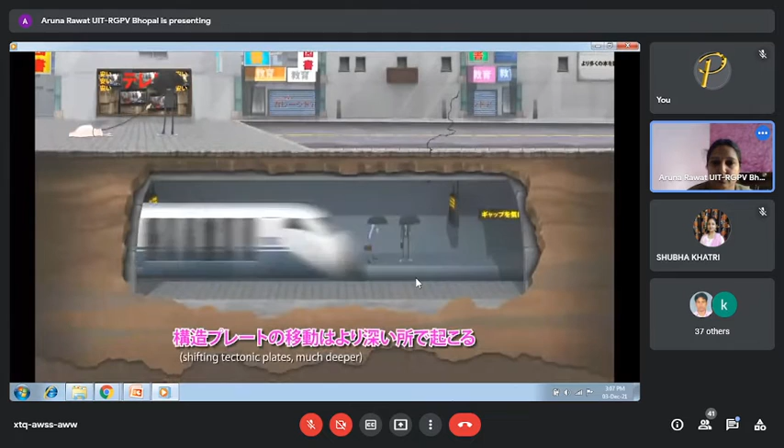If you've watched a lot of disaster films, you might have the idea that building collapse is caused directly by the ground beneath them shaking violently or even splitting apart. But that's not really how it works. For one thing, most buildings are not located right on a fault line, and the shifting tectonic plates go much deeper than building foundations. So what's actually going on?

In fact, the reality of earthquakes and their effect on buildings is a bit more complicated. To make sense of it, architects and engineers use models, like a two-dimensional array of lines representing columns and beams, or a single-line lollipop with circles representing the building's mass. Even when simplified to this degree, these models can be quite useful, as predicting a building's response to an earthquake is primarily a matter of physics.

Most collapses that occur during earthquakes aren't actually caused by the earthquake itself. Instead, when the ground moves beneath a building, it displaces the foundation and lower levels, sending shock waves through the rest of the structure and causing it to vibrate back and forth. The strength of this oscillation depends on two main factors: the building's mass, which is concentrated at the bottom, and its stiffness, which is the force required to cause a certain amount of displacement.

So my basic concern will be related to the building's strength and the stiffness of the building. Now, as you have seen all these sessions, this is your 14th session. So when you say a structure has to resist an external input,

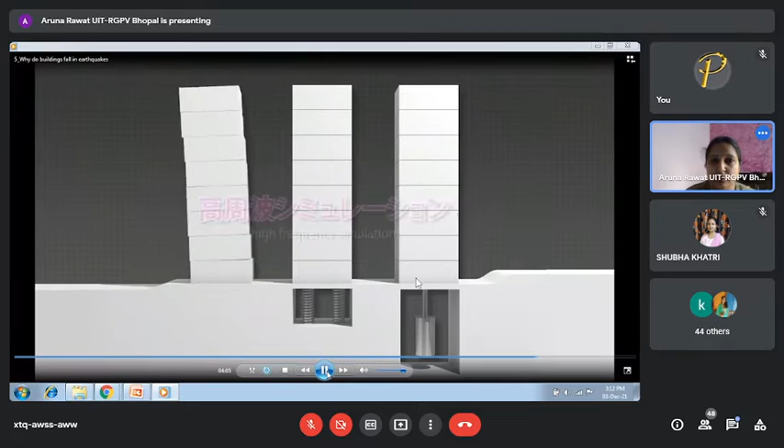Today, engineers work with geologists and seismologists to predict the frequency of earthquake motions at building sites in order to prevent resonance-induced collapses, taking into account factors such as soil type and fault type, as well as data from previous quakes. Low frequencies of motion will cause more damage to taller and more flexible buildings, while high frequencies of motion pose more threat to structures that are shorter and stiffer.

Engineers have also devised ways to absorb shocks and limit deformation using innovative systems. Base isolation uses flexible layers to isolate the foundation's displacement from the rest of the building, while tuned mass damper systems cancel out resonance by oscillating out of phase with the natural frequency to reduce vibrations. In the end, it's not the sturdiest buildings that will remain standing, but the smartest ones.

This video explains why buildings fail in earthquakes. I've shown you that video about the lack of strength and ductility due to poor detailing of reinforcement, basically speaking about RCC buildings, and how design deficiency is introduced.

Design deficiency is caused due to failure to understand the failure mechanism and deficient systems of calculation. If your structural analysis is incorrect, then the bending moment and shear force on beams or columns are calculated incorrectly. Based on that, the design will also be incorrect, causing a design deficiency. Precautions must be taken by the structural engineer while doing calculations or design.

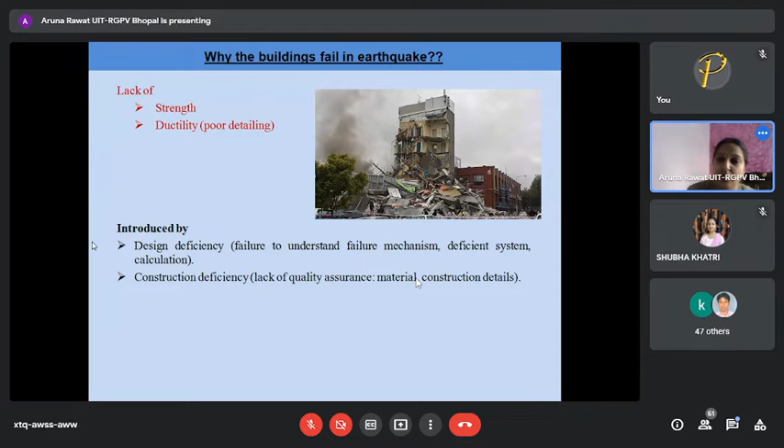What are the challenges in seismic design? Earthquake resistant design of any structure is very challenging because our input is random. We don't know how the input is there - there is uncertainty.

We don't know how much magnitude of earthquake will come, or for how much period it will last. Based on past records, earthquake zones are created in the IS codes or other codes of the world, but we don't know how it's going to happen in future.

The structural response depends on the input motion - how the earthquake motion is going to be - and also depends on the structural properties, like stiffness. Stiffness is basically a property where the height of the building, the cross sectional dimensions, and the material of the building have to be considered.

There is uncertainty in the input also - where the next earthquake will occur, on what fault it will occur, of what magnitude it will be, the nature of ground shaking near the source (the epicenter), and the effect of travel path on shaking at a distance.

Most importantly, as we saw in the video, making an earthquake resistant structure is not only the responsibility of a structural engineer, but it has to go hand in hand with the architect as well as the geological engineer.

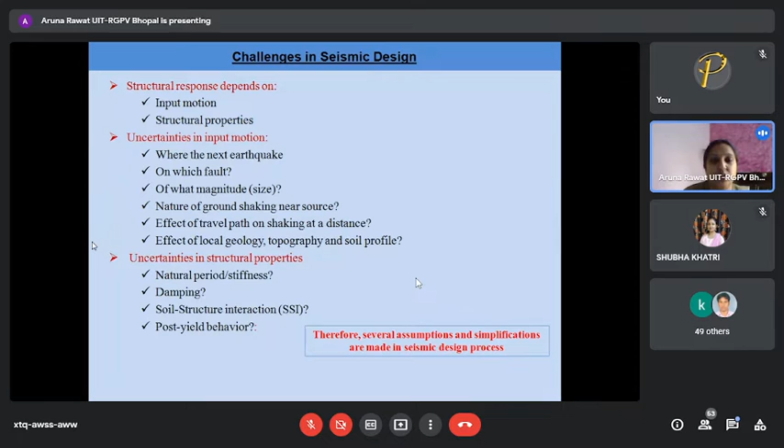How your structure behaves - all these things have to be studied. If the uncertainty of structural properties is studied correctly, then your structure will not collapse - it will bend, but it will not collapse. Therefore, several assumptions and simplifications are made in the seismic design process.

The objective of earthquake resistant design: we know that severe earthquakes are rather infrequent. So in the lifetime of a structure, it may happen that it will not face any severe earthquake - the probability is very low of strong shaking during its lifetime.

The next question is: should the structure be designed to withstand strong shaking without sustaining any damage? If the probability is very low, and you design a structure for such strong shaking, what is going to happen?

Constructing a structure to resist strong ground shaking can be too expensive. So the next option is that it may be logical to accept some damage in the case of strong but infrequent shaking. Our aim in earthquake resistant design is that loss of life and the content in the structure must be protected even in the case of strong shaking.

The final aim we have seen in all these sessions of the FDP is that our aim in earthquake resistant design is that the building shouldn't collapse, that is, there must not be loss of life and property, that the structure should stand, or there might be some structural damages which can be done in a repairable manner.

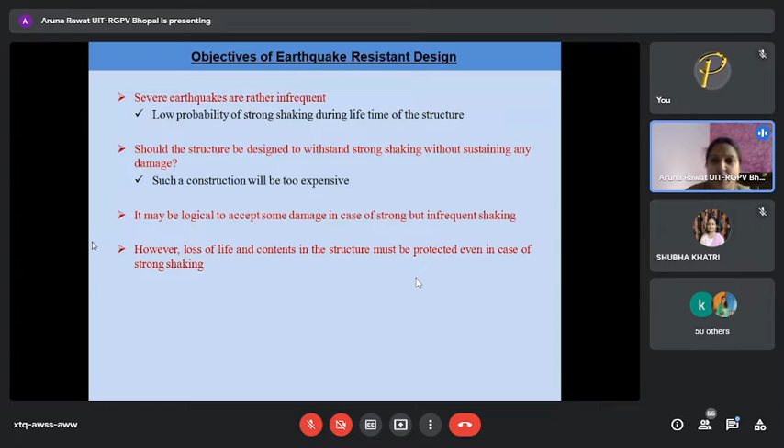So you have to go for some lightweight materials, which are now in advanced stages and are mostly used in the earthquake resistant design of structures.

So what is earthquake engineering? It is the application of civil engineering to reduce the life and economic losses due to earthquakes. That is the aim. When you say earthquake engineering, it is a part of civil engineering, and the aim is to mitigate the seismic risk.

So what is seismic risk from the engineer's perspective? It is the probability of losses occurring due to earthquakes within the lifetime of a structure. These losses can include human lives, social and economic disruptions, as well as material damages. So you have to reduce the seismic risk.

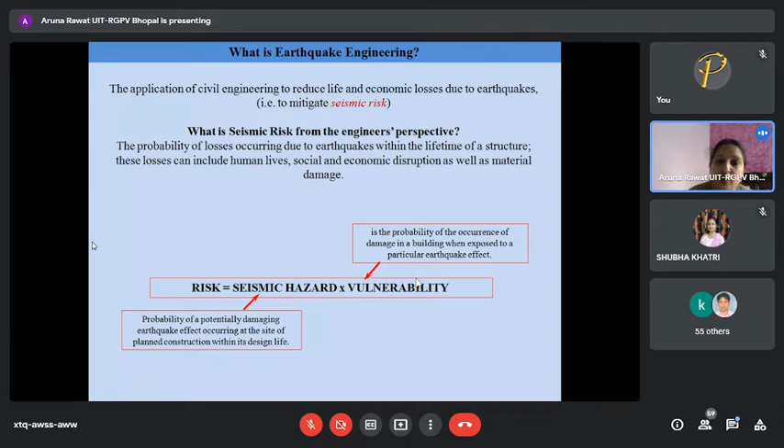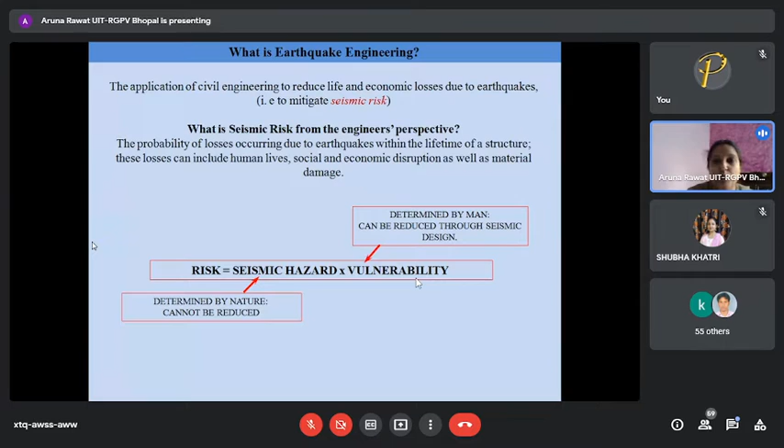So the seismic hazard is caused by nature, which cannot be reduced. But the vulnerability can be reduced, and that is what the earthquake engineer or structural engineer is doing - that can be reduced through proper seismic design of the structure.

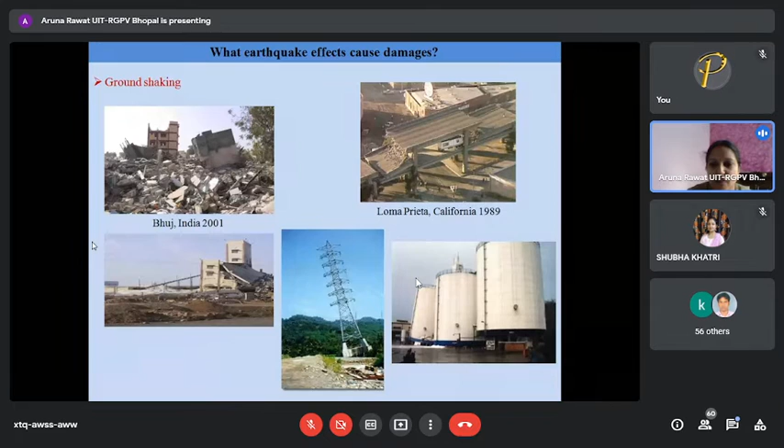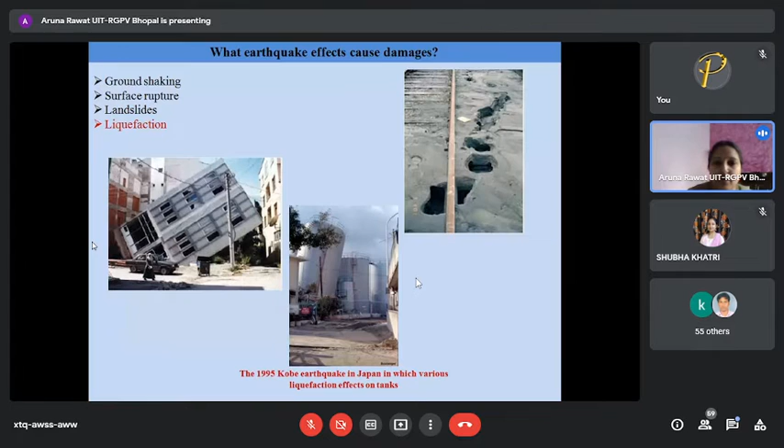So I will just show you the slides. This was already discussed by a number of experts in our FDP program. They have shown the effects of earthquakes which cause damage, like ground shaking, surface rupture, landslides, liquefaction effect, tsunami, and finally it may cause fire also. So I am skipping this quickly.

How can we achieve collapse prevention in the global sense? The one thing I discussed in the very first slide is the deficiency in design, which can be prevented by providing proper redundancy in the structure and also by proper detailing in the form of ductile detailing.

This part was also discussed by various experts, showing that a structure should be able to resist minor shaking with no damages. Moderate shaking may show some non-structural damages, like machinery damage, but no structural damage. In severe shaking, there are structural damages, but the final aim is that the structure should not collapse.

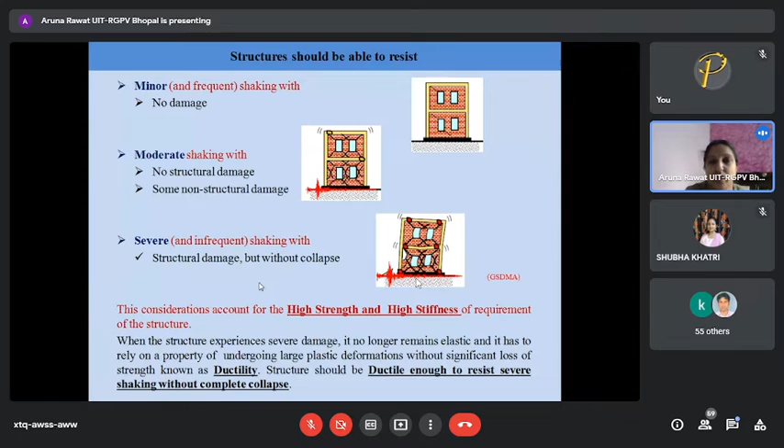So the structure should be ductile enough to resist severe shaking without collapse. The ultimate aim of an earthquake resistant structure is achieved through proper designing and ductile detailing.

Let me discuss some basics briefly. Ground acceleration occurs at the base of the structure, and due to that, structural vibration occurs due to inertia forces, which is mass of the structure into acceleration, generating force at the floor mass level.

Since earthquake force is in the lateral, horizontal direction, the horizontal members—the slabs, or what you can call the diaphragm—first transfer the force to the floor mass level. So suppose your building is 100 stories, the lateral force generated at the ground level will be transferred to all 100 floors of the building.

From that floor level, the aim of the building is to transfer this load coming on the floor level safely back to the ground. While transferring from the diaphragm to the ground, if this mechanism is disturbed, there is failure in the beam or column, and the structure fails.

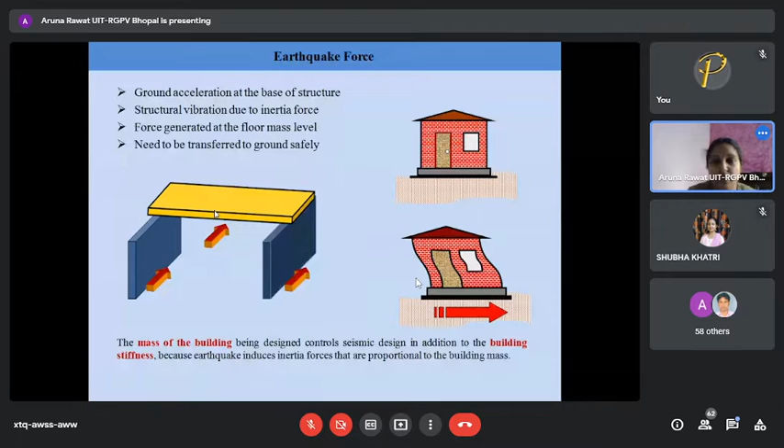The earthquake induces inertia forces that are proportional to the mass. Whenever you write the equation of motion, it is basically m times a. So m times a, the mass, that is the inertia force. Then you write the damping term: m x double dot, that is mass and acceleration, plus velocity x dot proportional to the damping of the structure, plus stiffness k multiplied by x, will be equal to the input force in the form of an earthquake. So the inertia force, the damping force, and the stiffness force of the structure, on the left hand side, will resist the input force on the right hand side.

It was also discussed that earthquake motion comes in a random direction, but for simplicity we resolve it into three components. The seismometers, or the seismological graphs generated at the recording stations, are given in the form of accelerations in the longitudinal direction, the vertical direction, and the transverse direction. So there are two horizontal components and one vertical component.

Generally from the design point of view, the vertical component may be in the upward or downward direction, and people generally neglect the vertical component of the earthquake. But in the past it has been seen that the vertical component can't be neglected. There are some evidences where, compared to the two horizontal components, the vertical component was more severe and cannot be neglected.

As in the case of the IS code also, IS 1893-2016 says that if you don't have the vertical component, you can take it as 2/3 of the horizontal or lateral component of the earthquake. But in the case of critical structures like water tanks, pipelines, dams, or nuclear power plants, the vertical component can't be neglected.

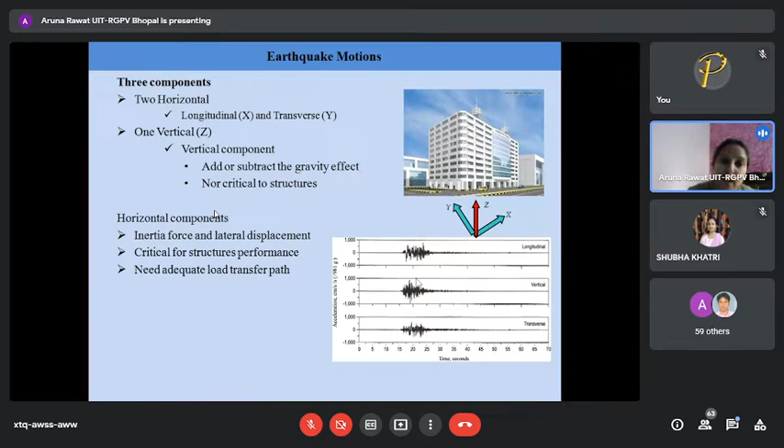In the case of horizontal components, you can see they cause inertia force and lateral displacement, and you need an adequate load transfer path. This is the most important part we will discuss here: the load path for seismic forces. The lateral or horizontal earthquake force first transfers to the horizontal members, that is, to the horizontal diaphragm or the slabs. So this load path for seismic forces is important.

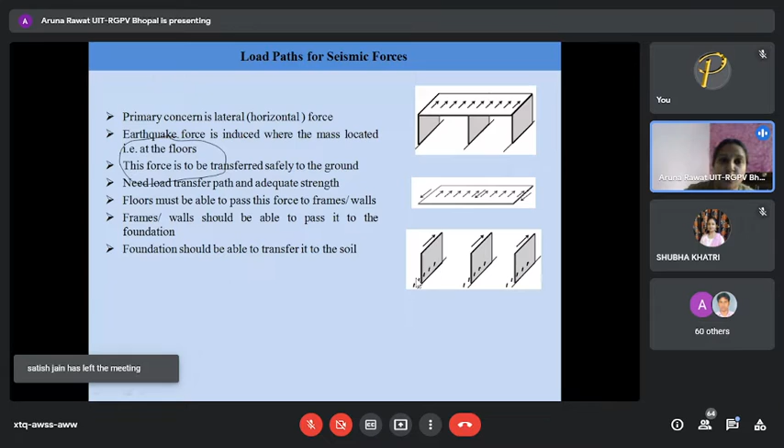The primary concern with lateral or horizontal force is that the earthquake force is induced where the mass is located, and the mass of the structure is located at the floor levels. So this force has to be transferred safely to the ground, and for that you need a load path. This load path has to be created, and it should have adequate strength.

The load has to be passed from floors to the walls or beams. If it is a load bearing structure, the diaphragm load from the floors will pass to the walls and then to the foundation. But if it is a framed structure, it will be transferred to beams, from beams to columns, columns to foundation, and finally to the soil below.

If this path is weak somewhere, it forms what is commonly known as the chain analogy, and this weak point is the link. If any one link in this chain is weak, it may create damage or collapse of the structure. So you have to detect the weakest link in the chain behavior.

If the building subjected to ground motion is idealized as a chain being pulled, then the links of the chain represent the building elements. One link represents the slab, one link represents the beam, then columns, then foundations, and so on. So this load path can be represented in the form of a chain of links. As different elements have different characteristics, the links of the chain will also have different strength and deformability.

Each chain will have a different link because your slab will have a different strength, the stiffness will be different, and the deformation will be different. Accordingly, each chain will have different properties in that case.

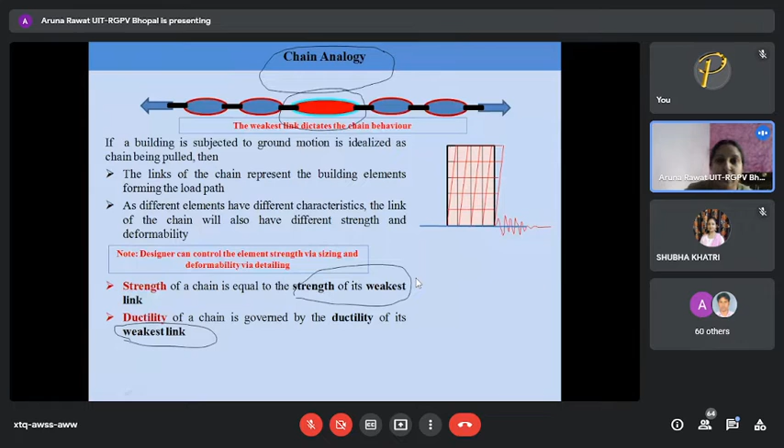So a designer can control the element strength by sizing, and deformability by proper detailing. The strength of the chain is equal to the strength of its weakest link, and the ductility of a chain is governed by the ductility of its weakest link. So your aim is to check that weakest link.

If a ductile link is there and we draw a force-deformation diagram for a ductile material, it will go elastic, then plastic, and there will be a large deformation. But if a brittle link is there, it will suddenly fail. Like glass or concrete materials are there - they are brittle materials, so sudden failure or collapse will occur.

So you have to see this weakest one. For example, if 110 is larger than 105, but if it is having a brittle link, then it will fail at 105. But if it is a ductile one, even beyond 105, it will carry 120 and so on.

So increasing the element strength does not increase the performance. Strength hierarchy rather than absolute strength is important in this case. So whenever the weak link is ductile and the strong link is brittle, then you are ensuring ductile behavior.

But if you make your strong link ductile and the weak link brittle, then the failure will occur due to that weak link, and since the weak link is brittle, the combined failure will be brittle. So the brittle link should be designed to exceed the capacity of the ductile link - your ductile link should always be less than the brittle link. Suppose your ductile link is 100, then your brittle link should be greater than 100.

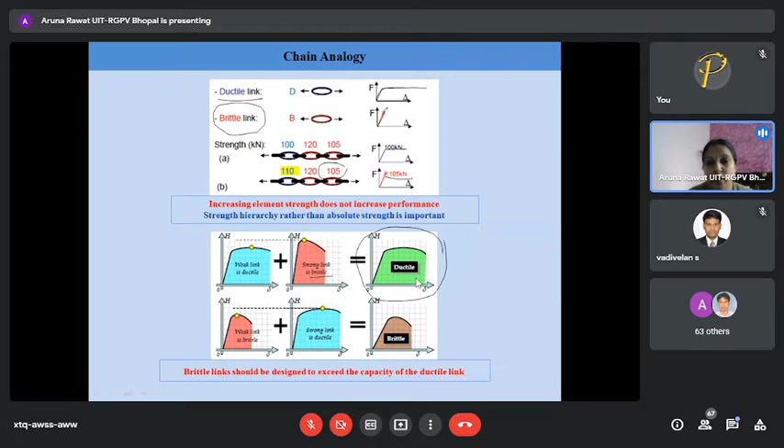So you want your structure to behave as a ductile link. So who should fail first in a frame? In an RCC building, it is made up of various components like slab, beam, column, foundation, and finally it goes to the soil. This is the hierarchy we see.

This is the load path we see. If a slab fails or a diaphragm fails for a particular floor in a building, it will affect that particular floor or room. The building is not going to collapse - that particular room or floor will have damage.

If a beam fails, it affects that story. If a column fails, it affects the whole building, and this is what we don't want - we don't want our columns to fail. So we go for the strong column, weak beam concept.

If your foundation fails, this is the most serious part, as discussed by our previous experts who showed the soil-structure interaction. If foundation fails, it is very difficult and more serious. And if your soil fails - like black cotton soil or liquefaction damages in the soil - it is even more serious. In this case, you have to work hand in hand with the architect, the structural engineer, and the geological engineer. So the convenience is in providing the ductility.

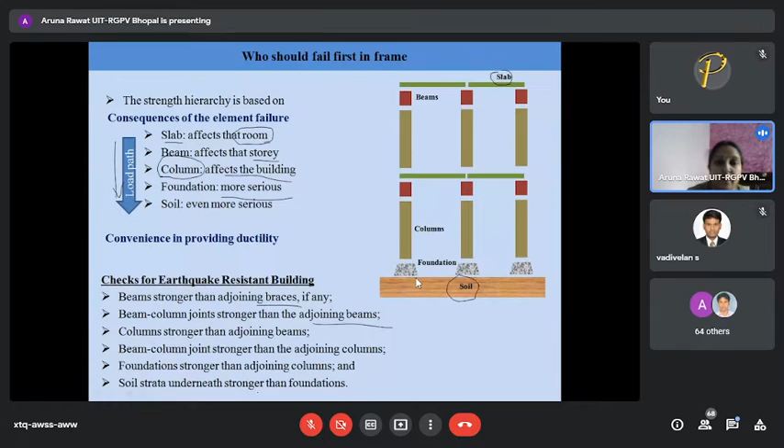If the load path is designed properly, then definitely your structure or building will be earthquake resistant. So what are the four aspects which architects and the design engineers have to work on to create an earthquake resistant design?

This has already been discussed by a number of experts, so I'm not going into too much detail on these figures. The seismic structural configuration involves the size, shape, and structural system carrying the loads, such that they ensure a direct and smooth flow of inertia forces to the ground.

Your building should be symmetrical, not unsymmetrical. Your plan should be symmetrical, like square or circular. You shouldn't go for X cross sections, Y cross sections, or C cross section shapes of the building. Also, the length of the building shouldn't be very large compared to the width, or the height very large compared to the cross sectional dimensions.

So this is how size, shape, and structural systems affect the seismic structural configuration. The next important aspect is lateral stiffness. Its lateral load resistance system is such that earthquake induced deformation does not damage its contents under low to moderate shaking. Stiffness is in terms of the cross sectional dimensions of the structure and the height of the building.

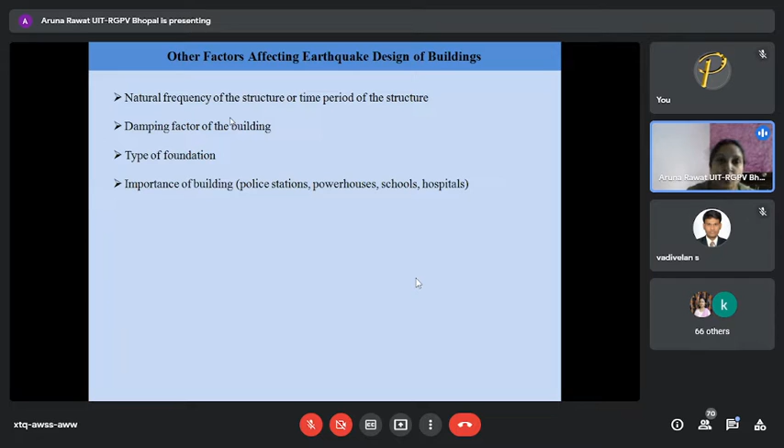For example, if you're designing a school building, the importance factor I has to be taken as 1.5, and so on. For normal buildings, we take it as 1. So all these parameters are considered in the earthquake codes.

There are some structural irregularities which increase the complexity of the structural behavior. The advice from earthquake resistant building design is that you have to keep it simple. If you create more complexity in the structural behavior, you disturb the load path of the structure, and if this load path is disturbed, you disturb that chain analogy, and finally the load will not be transferred safely to the ground, causing disturbance that leads to collapse or failure of the structure.

So whenever earthquake resistant design is done, it should be simple. It should not have a large number of structural irregularities. The IS code says you can't neglect irregularities, but they have given certain limits for them. Abrupt changes in geometry should be avoided. You have to avoid these types of complexities.

Non-uniform disposition of mass. Suppose you have a 10-story building and in all floors the mass is the same - no issue. But if at a particular floor you increase the mass, say at the sixth floor level, what has happened? It has created a non-uniform disposition of mass. If you have made that floor a storage area, or created a swimming pool there without considering the increase in mass, it may disturb the structural behavior.

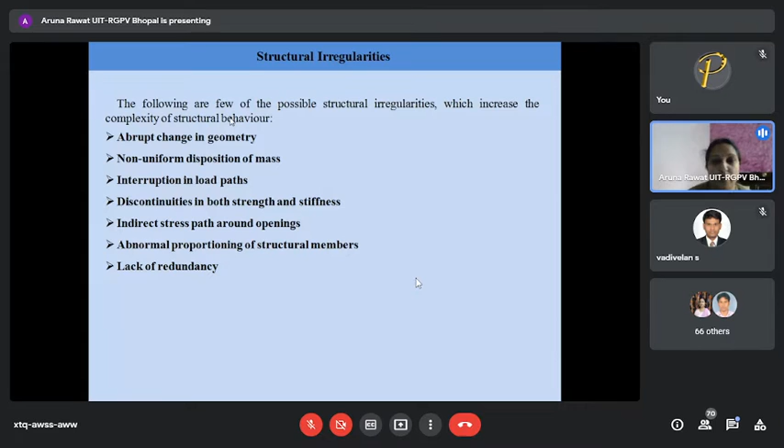Lack of redundancy is one of the two most important points which I discussed in my very first slide - the lack of redundancy and the lack of ductile detailing. If these two things are done properly, then definitely your structure will resist the earthquake.

So I will go for stiffness distribution first. We have seen in the previous slides strength and stiffness. The horizontal stiffness of the building depends upon its height and should be uniform. So you can't make a 10-story building with floor heights of 3 meters each, but at a certain height change from 3 meters to 4 or 5 meters - it shouldn't happen.

What is going to happen to the stiffness of the building? Suddenly at that particular floor where you have changed the height, the stiffness of the building gets changed, because stiffness is 12EI by L cube, or H cube you can say - it is inversely proportional to the height of the building. So you have to plan a building with uniform height in each floor. Then your horizontal stiffness of the building will also be uniform.

Change in the structural system of the building from one floor to the next will increase the potential for damage and should be avoided. So as I discussed, you can't suddenly change the height of any floor, and you can't suddenly change the mass of any floor.

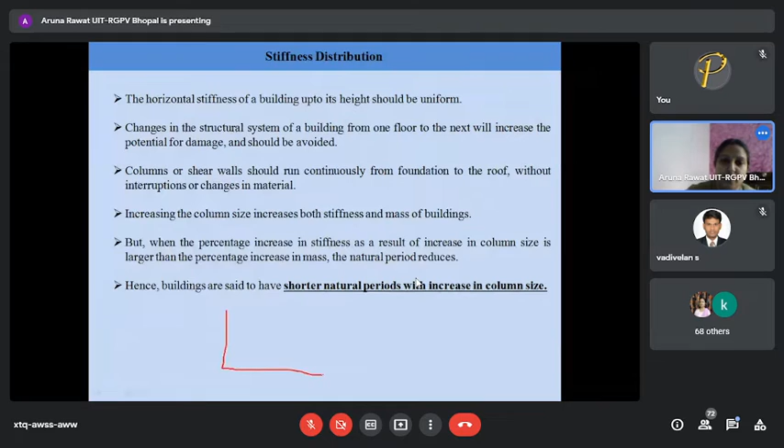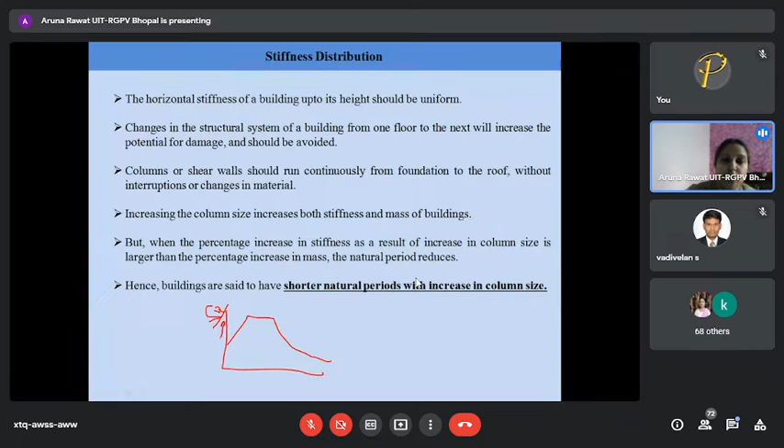Accordingly, the SA by G parameter, which you determine while calculating the horizontal acceleration—as discussed by the previous experts when calculating the base shear of a building—is related to this equation, and the SA by G graph was shown to you. This SA by G value, as discussed by many experts, along with the horizontal component, is most important, and this SA by G value is dependent on the time period of your structure.

This is the frequency of the structure. Now, if the frequency of your structure matches with the frequency of the earthquake, then definitely there is resonance, and your structure is going to collapse. So this time period of the structure is the most important part in designing for earthquakes, and this time period depends on the stiffness and mass of the structure.

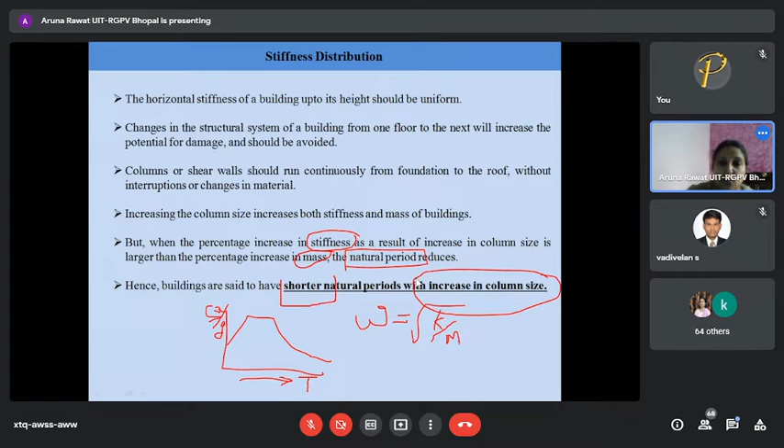So buildings are said to have a shorter natural period with increase in column size. If you are increasing the column size, what is going to happen? You are increasing the mass, and your time period, or omega, or frequency—that is your k by m—so if you are increasing the stiffness, what happens to the frequency? In this case, it will get shorter; your natural time period T gets shorter.

Next, here we have discussed related to stiffness distribution. Two important parameters which I am discussing are the stiffness and the strength.

The lateral strength of an RCC building depends on many factors, as discussed previously, like structural configuration adopted, the material strength and ductility, the relative sizes of structural members, amount of reinforcement used in the members, and the strength and stiffness of the joints between members.

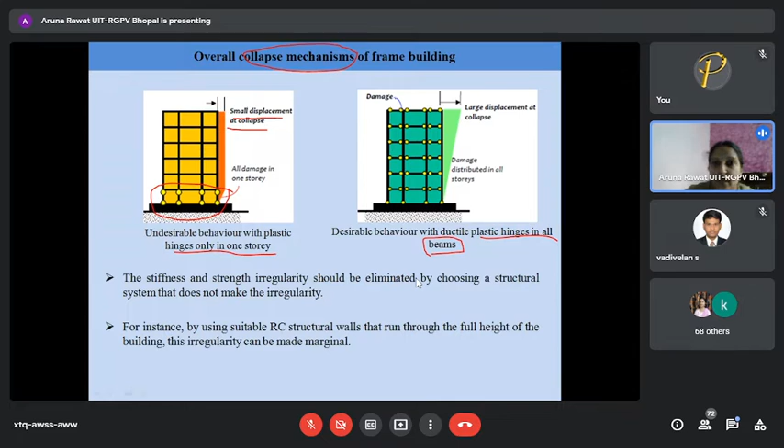But a desirable failure is one in which plastic hinges are formed in all beams. You want the beam to be weaker compared to the column, as seen in previous slides, so the damage will be in the beam part, distributed across all stories. There will be large displacement at the collapse state, but plastic hinges form in all beams while the column does not collapse - so if your column has no collapse, your building will not collapse and will remain standing.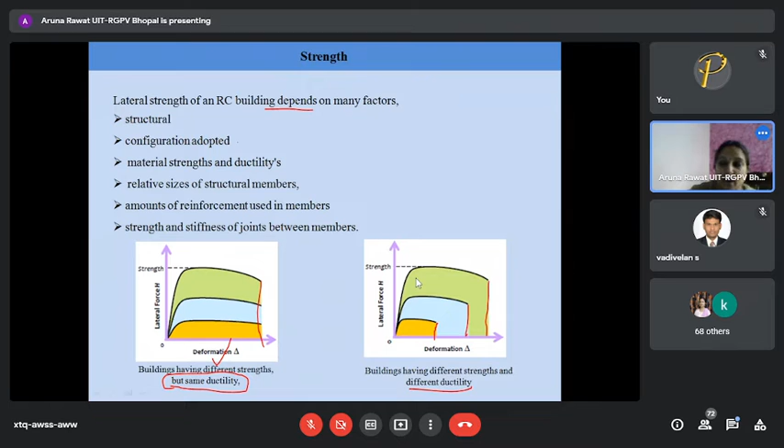So the strength and stiffness irregularities should be eliminated by choosing a proper structural system that does not create irregularity. The structural strength of an RCC building depends on proper structural configuration and the material adopted. For instance, by running a suitable RCC structural wall through the full height of the building, this irregularity can be made marginal.

There are collapse mechanisms - you might already be teaching this to your students - one is the sway mechanism of the building, and the other is the sway mechanism at the story level. If we compare these two mechanisms using the force-deformation diagram, for a building sway mechanism we get this type of curve, and the area of this curve is less.

The area enclosed represents the energy dissipated or absorbed. In the case of story sway mechanism, the force-deformation diagram shows the area enclosed is larger.

So what is going to happen? The energy dissipated, or based on the material you are using, energy dissipated or absorbed will be the larger one because the area enclosed is more.

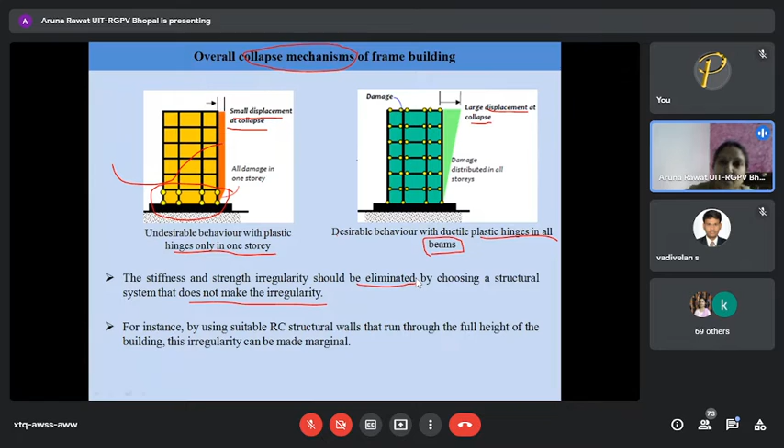So comparing the building sway mechanism and the story sway mechanism: in building sway mechanism, the damage is concentrated in the columns, in a single story. This undesirable failure is the building sway mechanism. The desirable failure is what we have seen in the story sway mechanism. The ductile demand of the column is larger in this case because all the damages or plastic hinges are concentrated in that particular story and columns. So the ductile demand at that column will be larger, and this type of building has a weak column and strong beam design.

But if I go for the story sway mechanism, which ensures that beams yield before the columns - we want this type of failure only. As discussed in the load path pattern and the chain analogy, beam yielding should occur before the column. This mechanism produces ductile flexural damage at the beam ends. Buildings in this case will have a strong column and weak beam design.

So in these types of buildings, a large area is enclosed in the deformation curve. Good energy dissipation happens through each of the inelastic hinges at the beam ends. This good energy dissipation is what we want - the energy should be dissipated. Earthquake produces energy, and that energy has to be released from your structure, either absorbed by the material or dissipated.

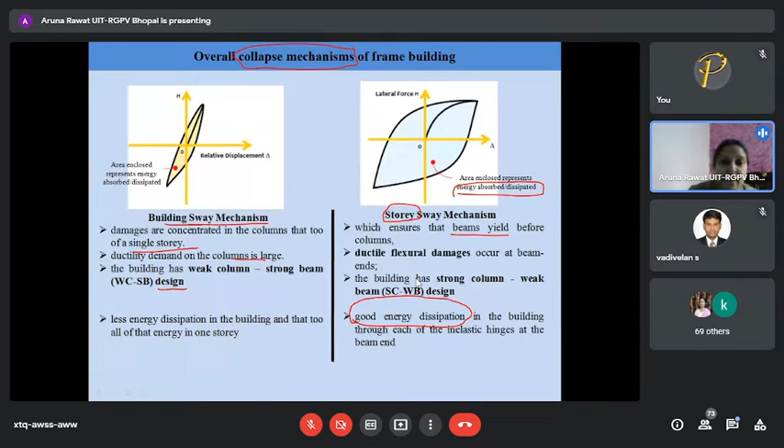Using various vibration control systems discussed by our experts - passive control systems, semi-active, active, and hybrid control systems - all of these are either absorbing or dissipating this earthquake energy. On the other hand, the building sway mechanism has less energy dissipation, and that energy is concentrated in one story only.

So this figure shows the strong column and weak beam design, and the other one shows the weak column and strong beam design.

If you want to stand properly, walk or run properly, your legs should be stronger compared to your hands and other parts. So who are the legs of the building? The columns are the legs.

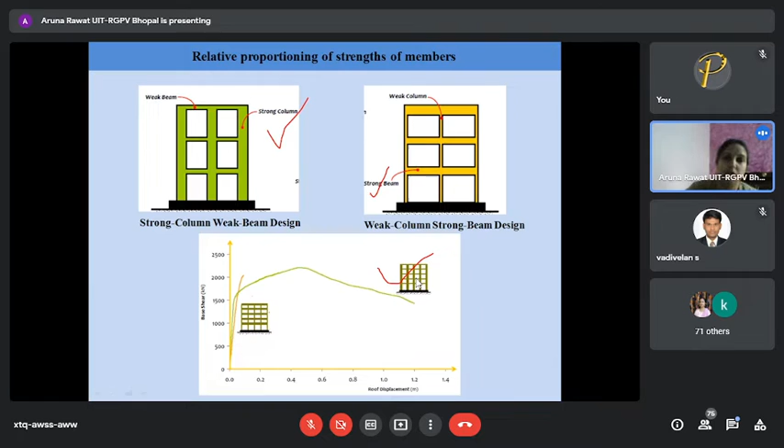You can see here a figure of base shear versus roof displacement, plotted for these two buildings. Here the deformation or roof displacement for the strong column weak beam design is more compared to the weak column design.

This failure was already discussed by the professors in previous expert talks, so I'm just going through it. Failure of a column can affect the stability of the whole building, but failure of a beam causes a localized effect, as discussed in previous slides. So it is better to make beams a ductile weak link rather than columns. In designing an RCC building, the strong column weak beam design method should be adopted.

I am skipping this part - it was already discussed that the summation of moments of the column should be greater than 1.4 times the summation of the moments coming from the beam.

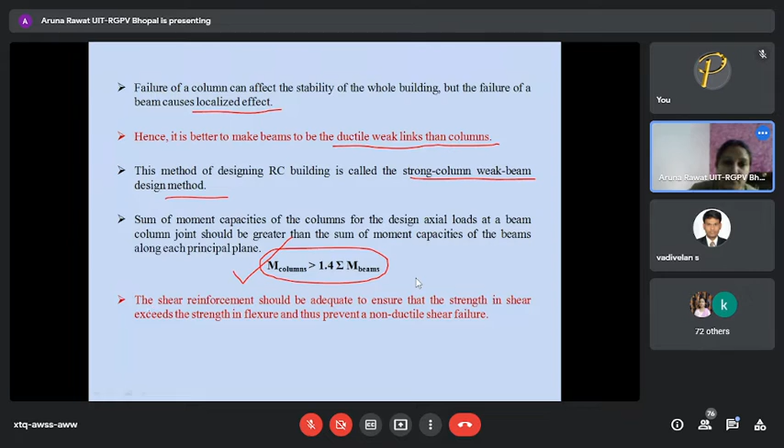So to make the beams ductile weak links, the shear reinforcement should be adequate to ensure that the shear strength exceeds the flexural strength. You want your beam to have a flexural failure, not a shear failure, so the flexural strength should be less compared to the shear strength.

How can you increase the shear strength capacity of a beam? By increasing the shear reinforcement, that is the stirrups. You can decrease the spacing between the stirrups, thus preventing a non-ductile shear failure.

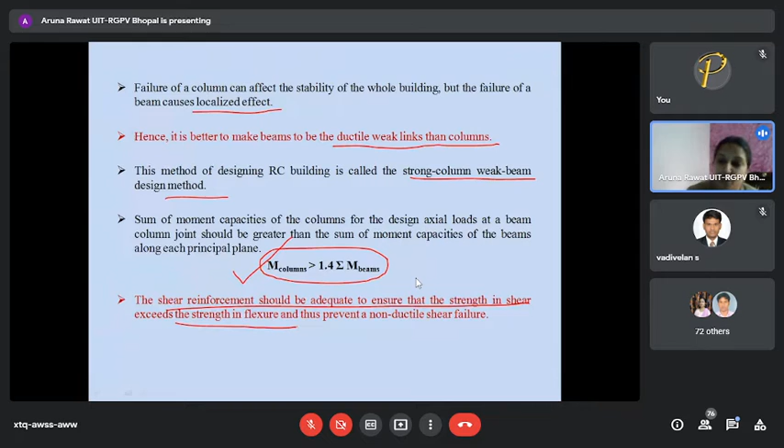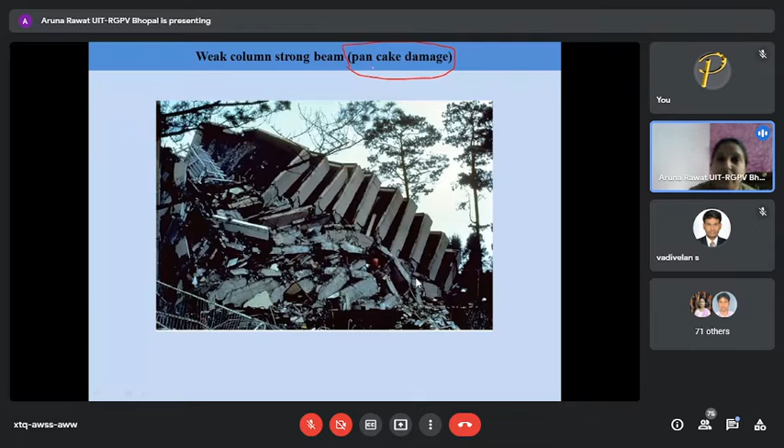This type of damage is also known as pancake damage. This is an example from the Bhuj earthquake in 2001, where you can see the floors resting one above another. The column has failed and the floors are resting one above the other like a pancake. This is also damage due to the weak column concept - the beams are standing, the slab is safe, but the columns have failed.

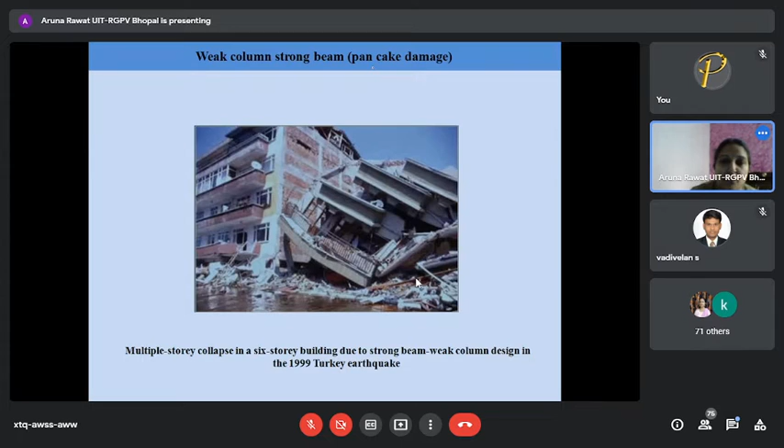Now this is important, which I was discussing previously also - that walls, in the form of a shear wall etc., have to be provided throughout the height of the building. It should go from the bottom of the building to the top. It shouldn't happen that you have constructed a column, and constructed a wall only in between. By using walls of full height, you provide a reasonable uniform stiffness and strength along the height of the building.

This is the most important part - when you are writing the equation of motion for a structure, there is one parameter which has to be considered, known as the structural plan density. The ratio of the area of the vertical elements resisting the lateral load to the plinth area of the building is called the structural plan density of a building.

Generally your SPD is low for gravity-only design of buildings, around 2% or less, and it increases for gravity plus lateral loads, where it has to be taken as 4% or more. So whenever you are considering earthquake forces or lateral forces plus gravity forces in your load combinations, your SPD should be 4 or more than 4. SPD can be taken as a measure to reflect the overall performance of your building, so you have to take care of this parameter also - the structural plan density. So what is structural plan density? It is the ratio of the area of the vertical elements resisting the lateral force to the total plinth area of your building.

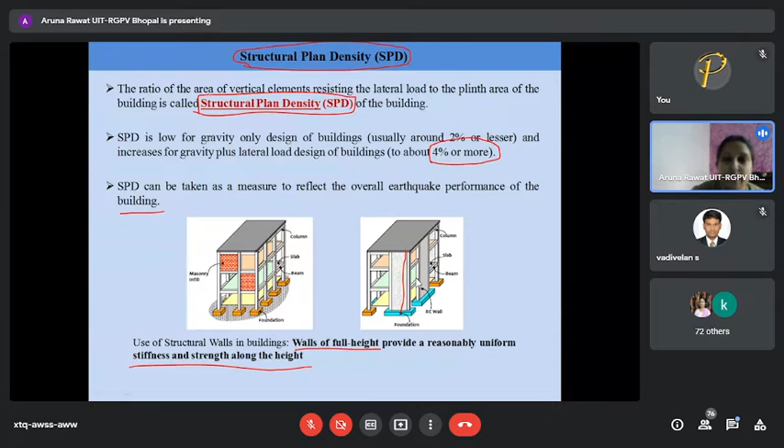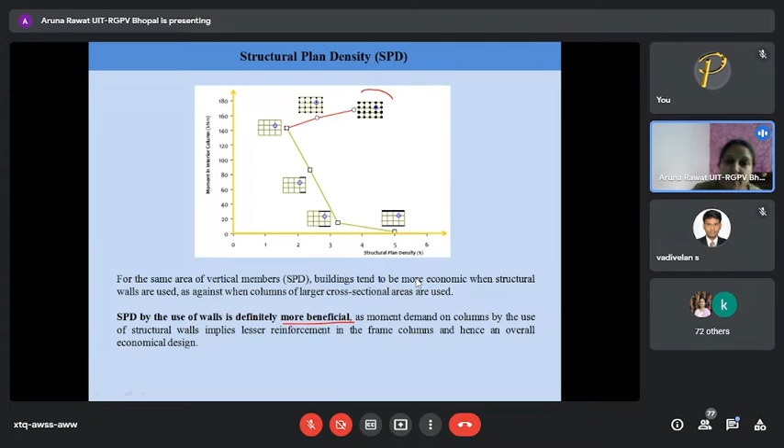This is an example where the SPD is being plotted for different SPD values varying from 0 to 6, and the performance of that moment in the interior columns is being shown. Here you can see the performance with the use of walls is definitely more beneficial, and it will increase the earthquake capacity of your building.

So what happens in that case? If you are making the plan asymmetrical, the center of mass and the center of stiffness do not coincide at any floor level, and the building gets twisted - there is torsion in the building, and this creates additional lateral forces and additional bending moment in your building. So the weaker columns reach their strength limits, stiffness deterioration in these columns results, and due to this asymmetry, twisting or additional forces will be created.

And if there is unsymmetry, what happens? Your cross sectional dimensions and reinforcement required will be more, so your structure will be expensive, it will be costlier. So it's better to make it simpler - a symmetrical plan building with uniformly distributed mass and stiffness.

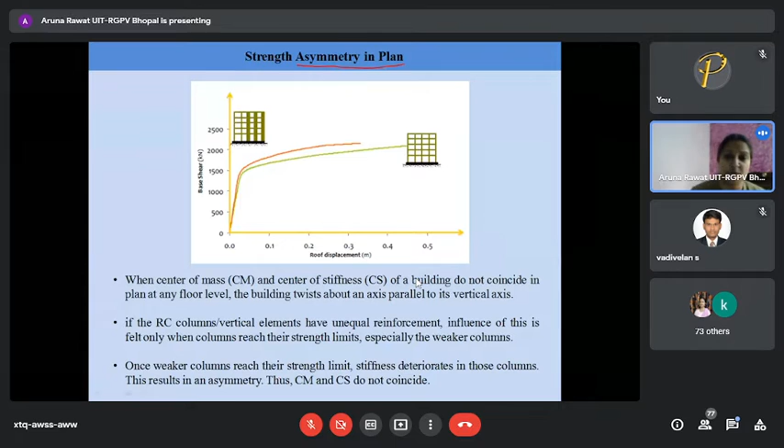This is what already I have explained you, that is the strength discontinuity in the elevation. There shouldn't be sudden reduction in the lateral strength of the building in the form of an open, flexible or weak story, in the form of a soft story, where openings are provided, there is no infill in the ground story, or suddenly the columns are made stronger but their dimensions are made less.

Here the column dimensions are changed. There is a sudden change in the member sizes, an abrupt change in the column sizes has happened. So here the concentration of forces will be more in this. This becomes a weak part, the weak chain in your chain analogy.

Generally people call it a soft story, where the brick infill masonry is not provided. It is commonly at the ground story, so that story is also known as an open story, flexible story, weak story, or soft story. People refer to it with different terminologies.

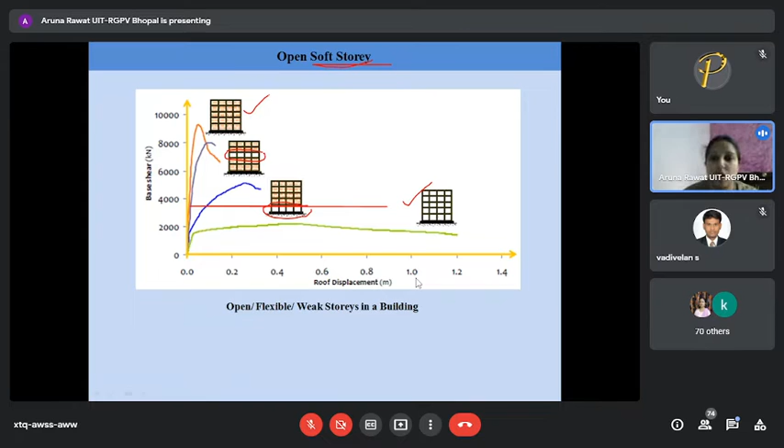Here you can see the bare frame building without any infill and how it behaves - the force deformation diagram, that is the base shear and roof displacement plot, is shown here. Here there is an open story at the ground floor, here the open story is at some in-between roof floor, and here total infill masonry is there. As we have seen in the previous lectures, infill masonry behaves more resistant to earthquake forces as compared to these types of weak story buildings.

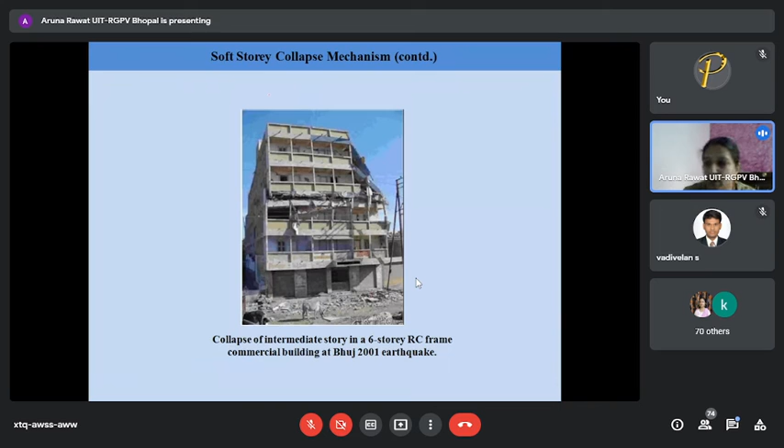These are some collapses of buildings where the soft story collapse mechanism was there. I am going a little bit fast because this was already shown to you.

Soft story - here you can see this third story was acting as a soft story, so the whole building, that soft story has collapsed there.

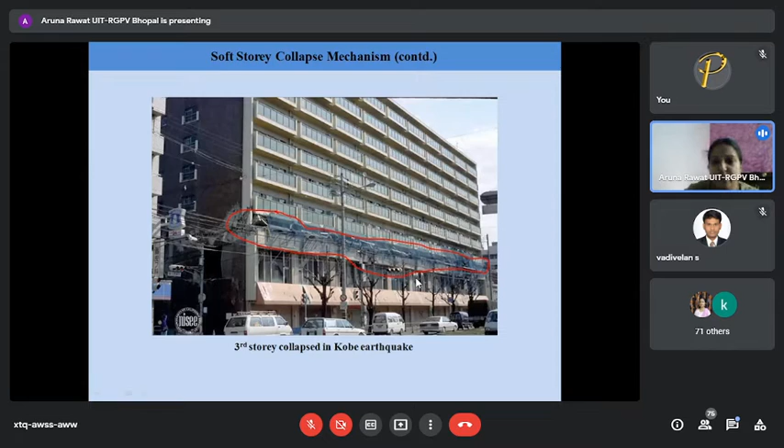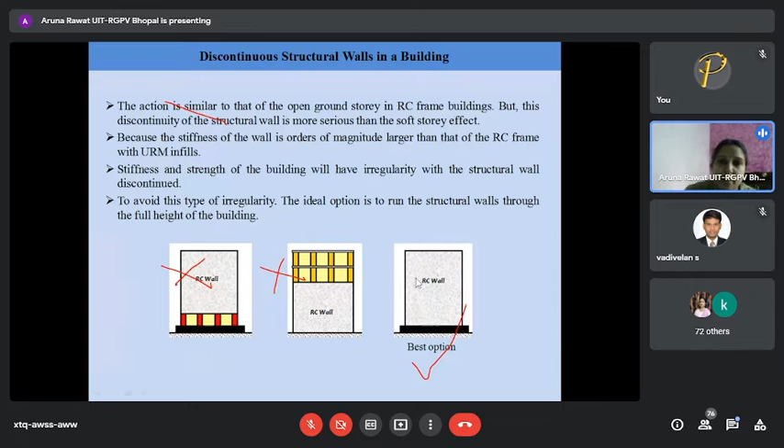This is what I'm telling you, that the discontinuity of the structural wall in a building should be avoided. It should be continuous. To avoid this type of irregularity, this shouldn't happen, you shouldn't do like this, this shouldn't be there. The best option is to provide it from the foundation to the total height, so that ultimately you are not disturbing the stiffness and the strength of the building.

One more concept which is mostly considered in buildings is the short column effect. Short columns attract large horizontal forces as compared to tall columns - you know the slenderness ratio. Based on this slenderness ratio, we decide whether it is a short column or a slender column.

So the short columns are stiffer, and due to that they attract more earthquake forces as compared to the slender columns. The stiffness of the column means the resistance to deformation - the larger the stiffness, the larger the force required for its deformation. So if a short column is not adequately designed for such large forces, it can suffer significant damage during an earthquake, and this behavior is known as the short column effect.

There is one additional clause given in the design - if you have gone through IS 456, there is a design for the pedestal which takes care of this short column effect. So I am skipping this a little bit, I will just explain you with the help of these figures.

These are some examples where the short column effect is there in buildings. If the buildings are provided on sloping ground, one of the columns is a short column and one of the columns on a corner is a tall column, so here the short column effect is there. Or if in between columns you have provided a mezzanine flooring, this also creates a short column effect in the columns.

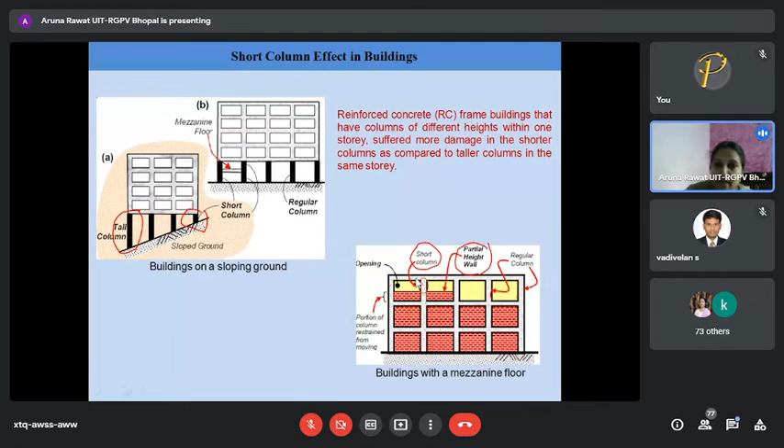So the effective height of the column over which it can bend is restricted by the adjacent walls. This short column effect is more severe when the opening heights are smaller compared to the height of the column.

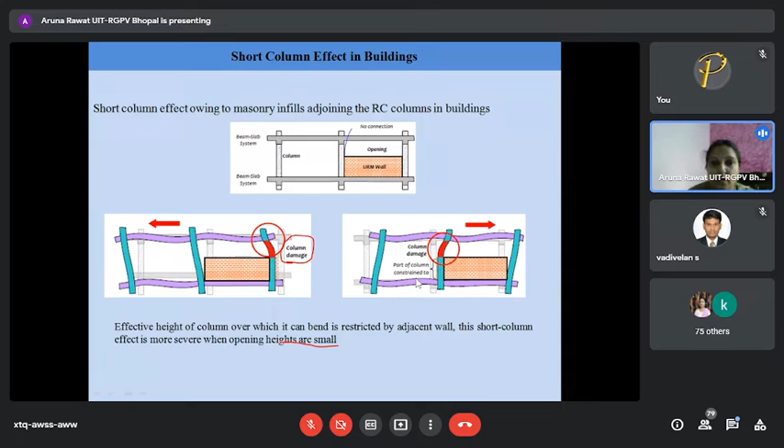Now this is what we study in the case of the boundary conditions of the column, like the slenderness ratio of the column. This height gets changed if you are providing partial height masonry infills.

Short column effect is also seen in some RCC columns, if a mezzanine flooring or loft slab is provided. This type of bracing system in between, or K-bracing systems, or a staircase beam, or in the case of plinth beams in the ground story where the columns are - these are short column effects.

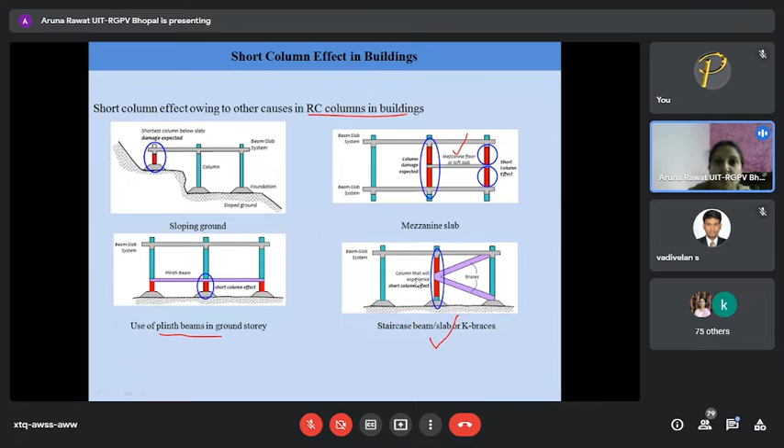Even when it is on sloping ground, which I have already shown you - these are some examples, and you have to take proper precautions in the design for this short column effect in buildings.

These types are floating column effect and short column effect - this is a floating column effect, where the alignment of the column is changed, the position of the column. They are not properly aligned in one line.

So what has happened here? The load path will not be proper. It should go aligned in the vertical direction in the column, but in between you have disturbed it - disturbed the alignment of the beams, disturbed the alignment of the columns, suddenly changed the height of the story. This creates short column effect and disturbs the load path.

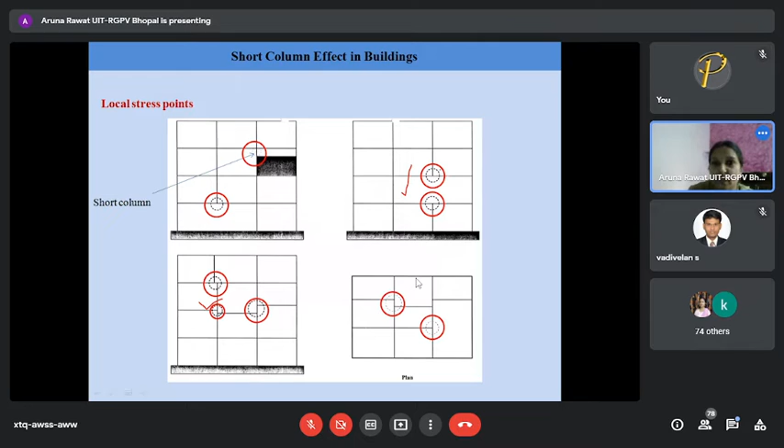Here also, this is a very typical example where suddenly a column was there from the ground story up to one story, and then it is broken, and again it is started. So this type of precaution you have to take to avoid this, and this is what creates a weak link in the building.

So these are some short column effects in the building in the form of a staircase. You can see where the staircase is providing this staircase landing part - the short column effect.

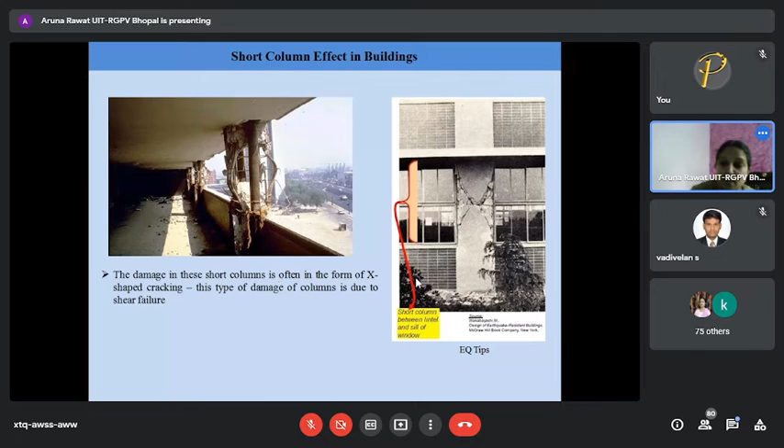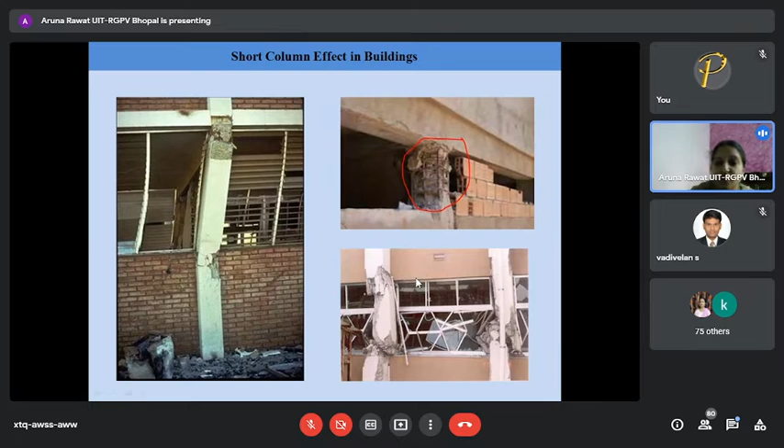This is also a typical example of short column effect in the building. So short column failure is a brittle failure. You can see the reinforcement is as it is, but the concrete has failed here because it is a failure due to shear. Here also you can see how the reinforcement has bulged out because it is having a bulging effect - bulging short column effect.

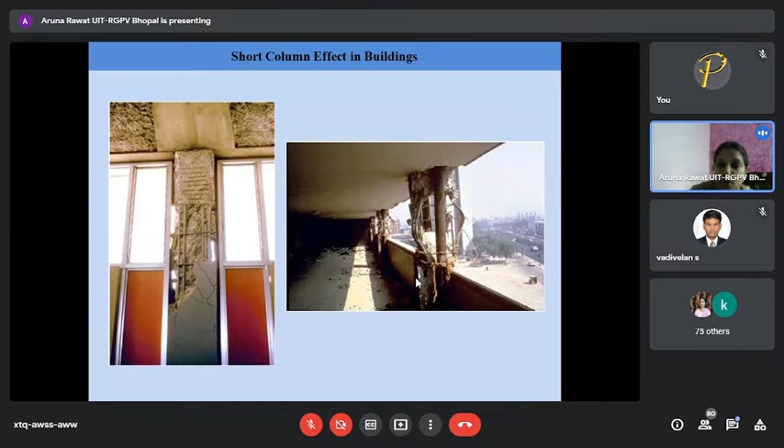Now IS 1893:2016 recommends that buildings follow these lateral stiffness strength criteria given in the IS code.

In the IS code clause, the lateral stiffness in any story should not be less than 70% of that in the story above, or less than 80% of the average lateral stiffness of the 3 stories above it. So whenever you are changing the stiffness, the above and below story should not be less than 70%.

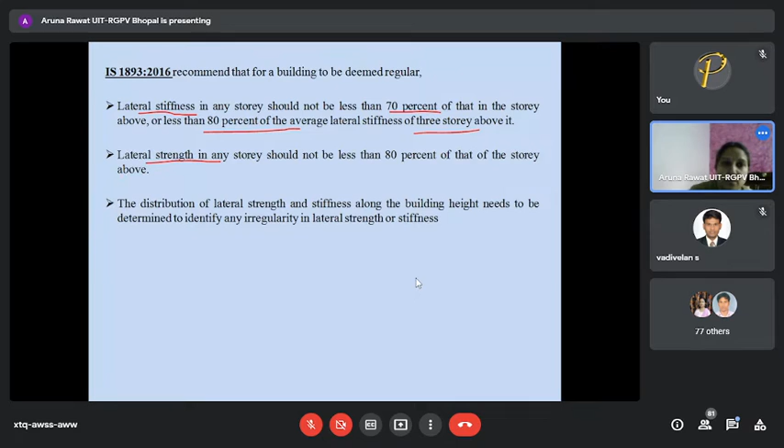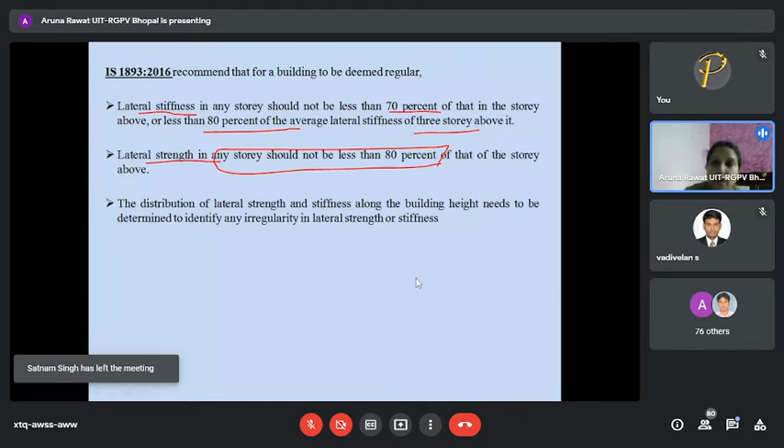So the distribution of the lateral strength and stiffness along the building height needs to be determined to identify irregularity in lateral strength and stiffness. IS code has given various irregularities: mass irregularity, stiffness irregularity, torsional irregularity, and setback irregularities, all given in IS code 1893. And lastly, ductility is there.

So in my presentation, I have discussed the seismic behavior of RCC buildings with respect to four aspects which have to be considered in design. One of the factors is ductility. So in short, I am discussing ductility - you have to increase the ductility. So how can you increase it?

You can make a simple and regular structural configuration, which is the basic aim of earthquake resistant design of a building. Using more redundancy of the lateral load resistance system, and you have to avoid column failure by adopting the weak beam and strong column principle in design. You have to avoid foundation failures and brittle failures due to shear, bond, anchorage, or compression failure in bending.

And you have to provide proper lapping of the vertical reinforcement, proper special confinement of concrete at critical points - at beam column joints, at column foundation joints. You have to do proper confined reinforcement as per IS 13920, by provision of lateral ties, so that the concrete can undergo large compressive strain before failure.

And lastly, most important, in the case of beams, as we were studying in our bachelor's also, the beam should be designed as an under-reinforced section so that it can undergo large rotation before failure. So you want your structure to fail as a flexural one. You have to design your structures accordingly.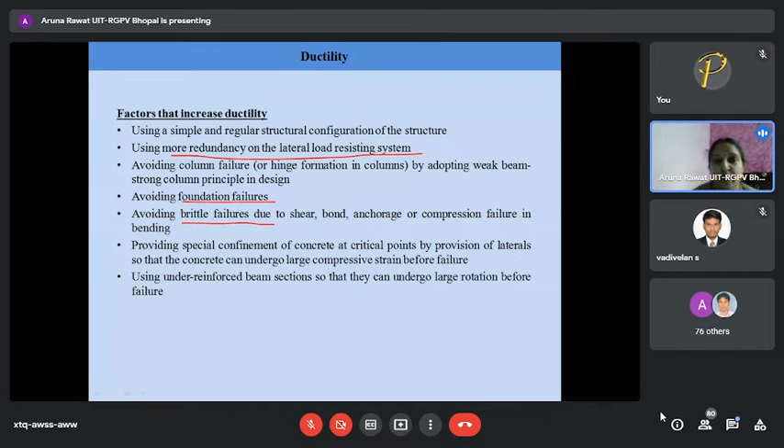So here the masonry infill was provided for all the stories, and there was a soft story. These are the reinforcement detailing and the column cross sections for the beam and columns, and the reinforcement detailing. These are the masonry infill RCC frames with soft story, provided here.

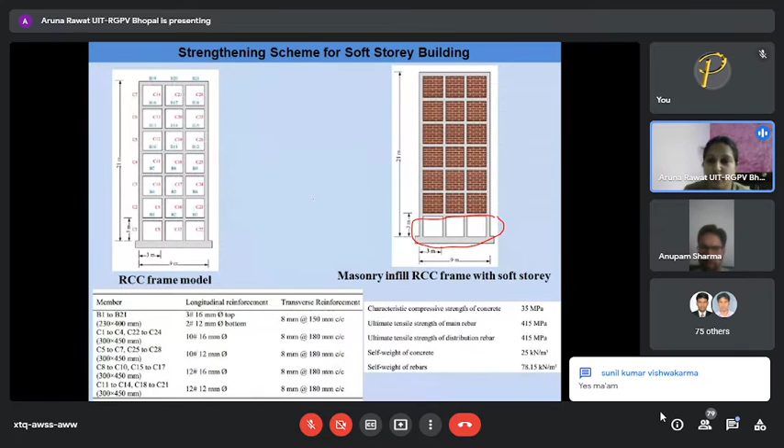Here the masonry infill of an RCC frame with soft story was studied. We have provided in the soft story 33% infill, then further we have taken 66% infill, and then we have strengthened that soft story with a shear wall.

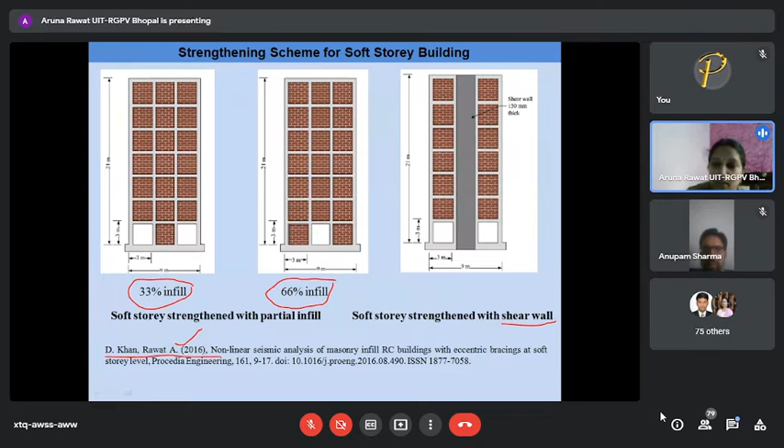This is the paper which is published, you can refer to this paper, it is available. The comparison is done, and further we have done strengthening of this soft story. One we have done with partial infill, second with the shear wall, and then we have done the strengthening with FRP.

Here for FRP we have used glass fiber reinforced polymer (GFRP) and carbon fiber polymer of 1 mm thickness, with modulus of elasticity 70,000 and 2 lakh, and 2,15,000 megapascals E value was taken. You can see how the soft story columns are being wrapped with the help of these FRPs.

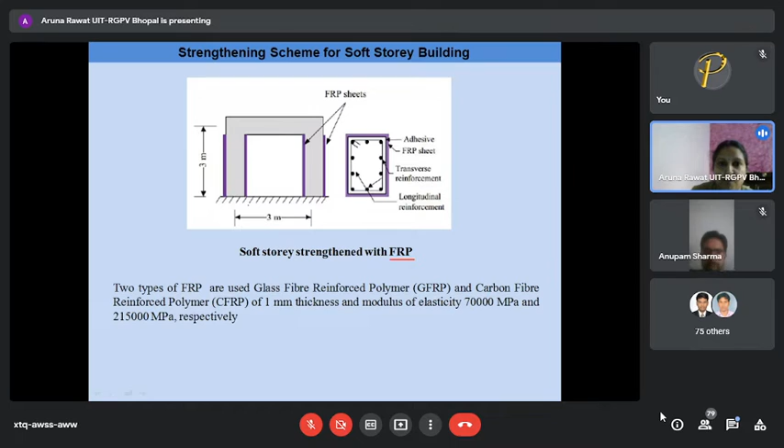So this is what the strengthening technique was. One more strengthening technique which we have done is to provide eccentric bracing. Since it is a parking area, we have to allow for the parking of cars, so eccentric bracing was used for the strengthening of the soft story.

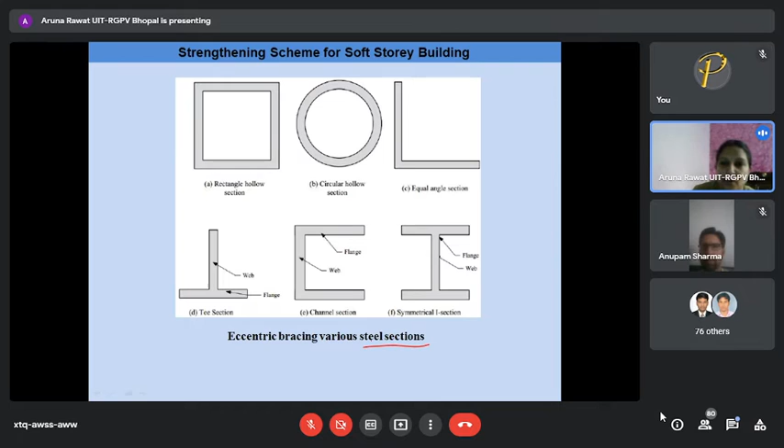The dimensions of the eccentric bracings are shown here. Eccentric bracing was used with various steel sections like hollow rectangular section, hollow circular section, equal angle section, T section, channel section, and symmetrical I section. We have studied it for all these 6 different sections used for these eccentric bracings.

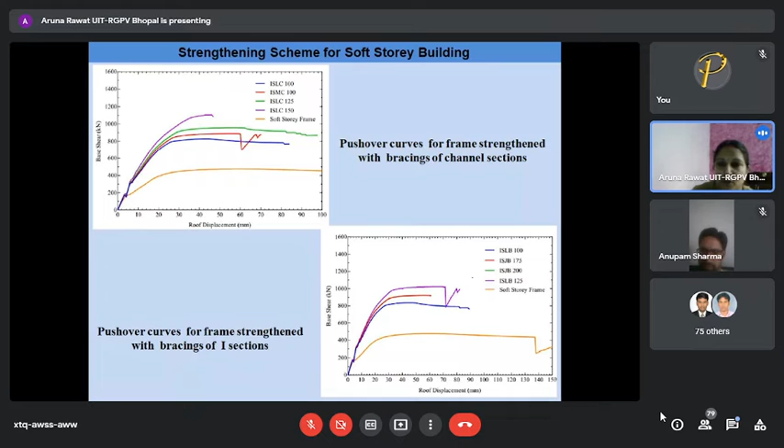Finally, for the channel sections and for the I sections, the performance was studied for the pushover analysis. So finally, what is the performance point we are getting?

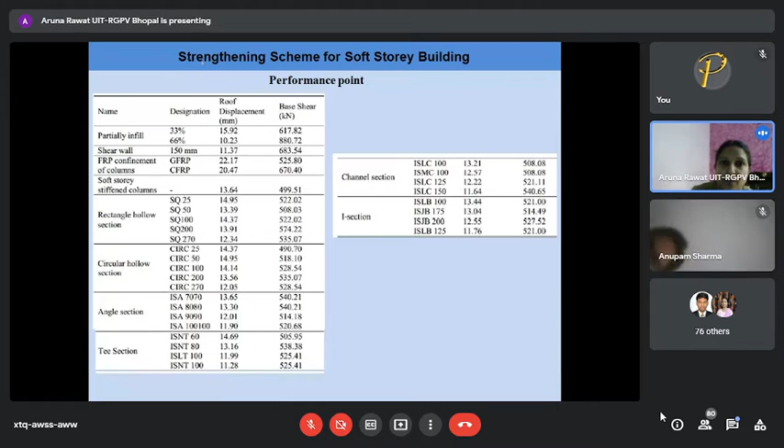A comparative table between the partially infilled, shear wall, FRP confined column, and eccentric bracing systems with different sections was made. The roof displacement and base shear performance of these various frames were studied, and the performance points were determined to find what is better for the strengthening scheme of the soft story building.

So finally, this is what was shown for roof displacement, but if you do it for the first story - because the first story was a soft story where the concentration of displacement was larger compared to other stories - if you compare the reduction in first story displacement in the strengthened frame, you can see the shear wall performs better, with a reduction of 98.76% compared to the soft story building.

Compared to others, the eccentric bracing building also performs better, and this is what is done for first story displacement comparison. The first story displacement is critical in soft story buildings, and strengthening schemes are compared based on their capacity to reduce first story displacement. It has been observed that shear walls perform better, and eccentric bracings also perform better, with a reduction of about 75 to 85% in story displacement.

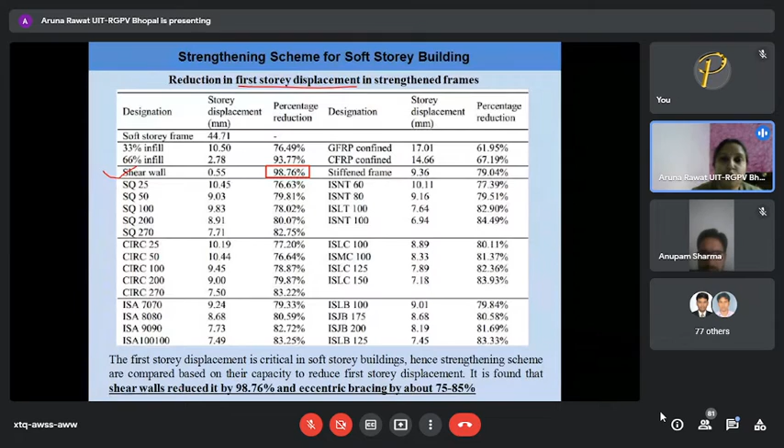Next, we will continue with one more study based on irregularities, which was the vertical setback irregularity, and vertical setback irregularity is in the form of the elevation.

Here we have carried out the time history analysis. The previous example which I discussed was based on the performance. This is based on the time history analysis where an incremental dynamic analysis was carried out. So here we have actual real-time earthquakes like Kobe 1995, Loma Prieta 1989, and Northridge 1994, which were provided as input to these different frames of setback irregularities, and we have studied the performance. This was a G+10 residential building with a story height of 3 meters.

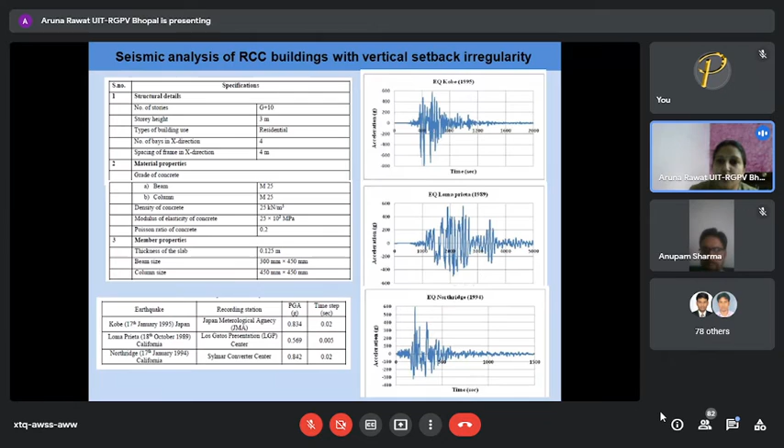These are the various descriptions of beam and column and the various properties of this RCC building. So these are the time histories. You can see time versus acceleration, time history for the 3 earthquakes which we have considered. This is the time period of the models we have considered.

These are the time histories for the Loma Prieta earthquake. You can plot the time history for each floor level for different parameters like responses, how you are measuring acceleration, displacement, base shear, bending moment, and so on. We have plotted vertical graphs for the different story heights and the absolute acceleration. On the x-axis, the parameters were changed like absolute acceleration, displacement, base shear, bending moment, axial forces, and along the height of the building for different models, the responses were plotted.

These are the peak responses plotted for a particular time. Here the peak response we are getting, irrespective of the time, is being plotted. Finally, this is the displacement curve, and this is the story drift curve for the Loma Prieta earthquake. For all 3 earthquakes, the different response plots were carried out.

Finally, what we can say is that as the vertical setback irregularity in the building increases, the fundamental time period of the building decreases, which we can see from this plot also: for a regular building the time period was 5.54 seconds, and with irregularity it was 3.8 seconds. So the setback irregularity in the building model introduces increments in displacement, story drift, shear force, and bending moment along the height of the building.

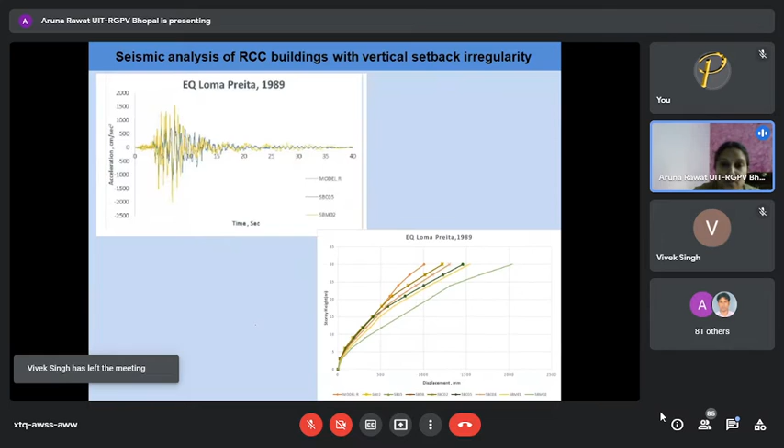It can also be observed that the story displacement, story drift, shear force, and bending moment with vertical setback irregularity at mid height of the building are more as compared to irregularities provided above and below the mid height. So mostly you have to avoid irregularities at the middle height. Either irregularity at the bottom side or at the top side can be done, but mostly you have to avoid the mid height of the building, which has more response compared to irregularity above or below the mid height.

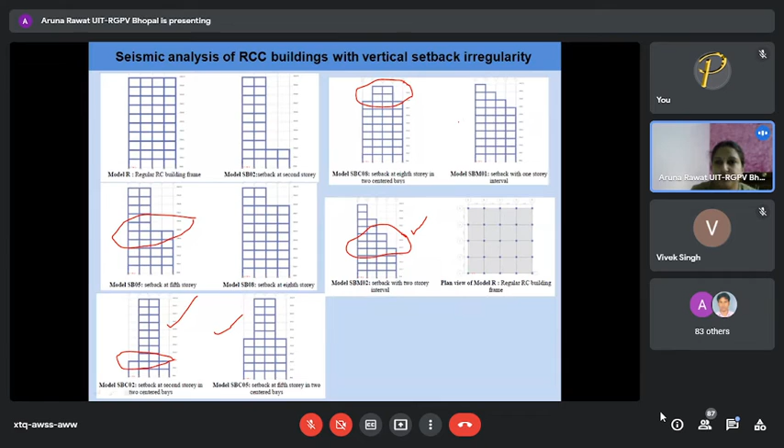It can also be seen that multiple setback irregularities develop more story displacement as compared to a single step irregularity. This multiple setback irregularity shown here is one example of multiple setback irregularities that should be avoided in buildings. So proper analysis of these types of irregularities in the building has to be carried out.

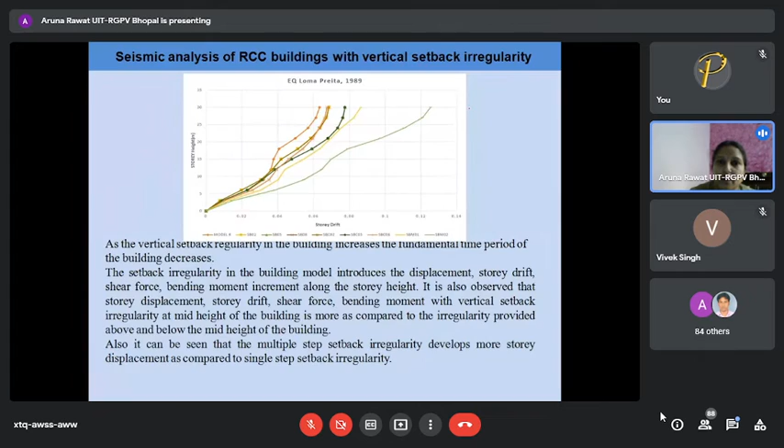So finally, what we have studied in the last 5 days is, based on Henry, an earthquake engineer of the US: if we have a poor configuration to start with, all the engineers can do is provide a band-aid or improve a basically poor solution as best as we can. But if we start with a good configuration and reasonable framing system, even a poor engineer can't set back the ultimate performance too much.